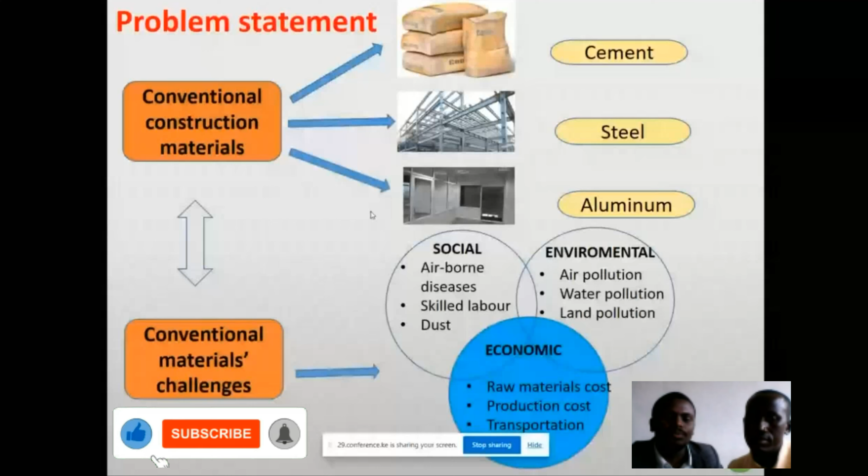To the problem statement: we are currently addressing a problem whereby we have been using conventional materials such as cement, steel, aluminium, whereby in the industries and manufacturing processing we are having challenges that are social, environmental, and economic. We are considering the economic aspect, which is the availability of material, production cost, transportation, and the cost of the raw materials.

Our main objective in this research is to investigate the suitability of lateritic material when it is blended with termite clay and varying proportions of cow dung. We have four specific objectives: one is to determine the physical properties of the material, compressive strength, water absorption for these CEB blocks, and finally determining the optimum mix ratio for these CEB blocks.

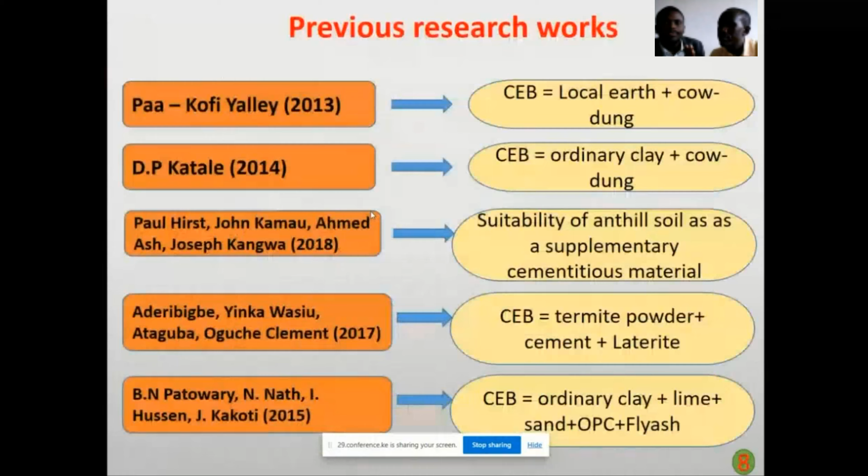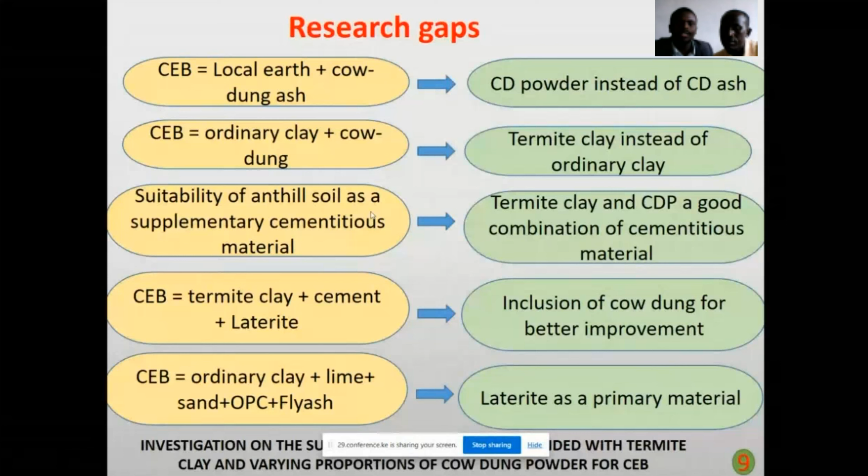In previous research, researchers have studied compressed earth blocks. But in this case, from what researchers have done, we consider doing it using cow dung powder instead of ash, termite clay instead of ordinary clay, termite clay as a cementitious material because of its properties, cow dung powder for better improvement, and lateritic gravel as the primary material for this research.

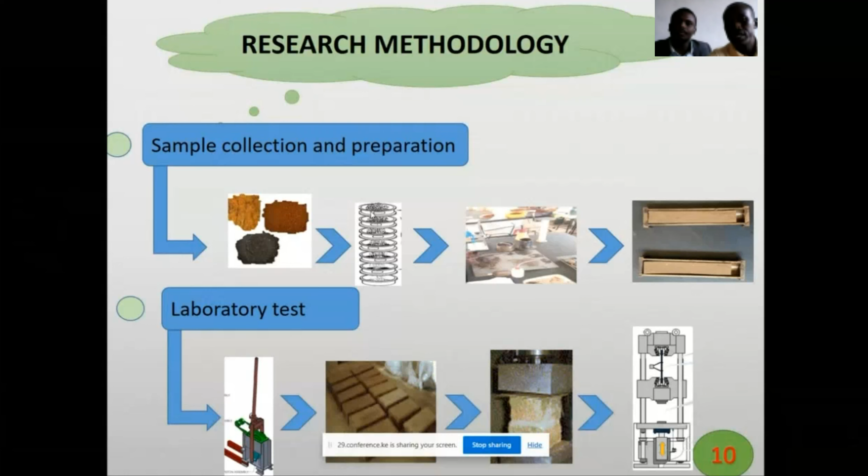On the research methodology, we are looking into sample collection and laboratory tests that we carried out in order to achieve all our objectives.

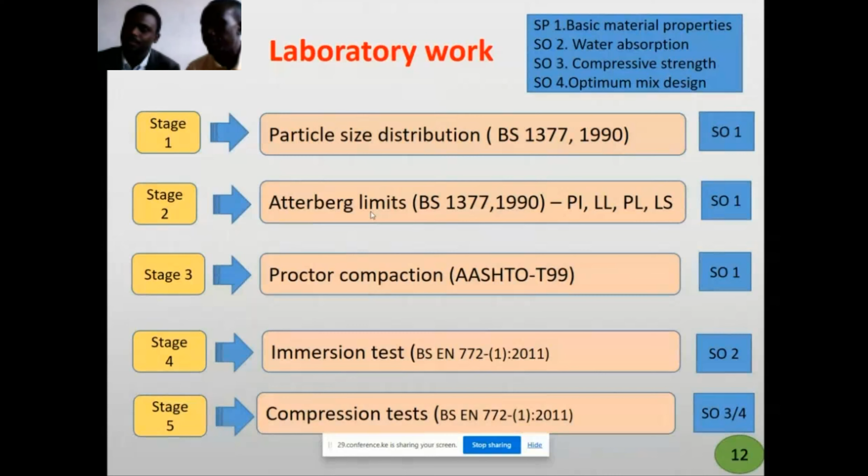In our laboratory work, we carried out several tests which include particle size distribution, Atterberg limits, Proctor compaction, immersion tests, and compression tests. All these tests enable us to achieve specific objectives 1, 2, 3, and 4, as indicated in the slide.

After the research and the tests, we made the observations of this project. For the particle size distribution, we found that the laterite was well graded, and the clay soil also had uniform and well graded particles.

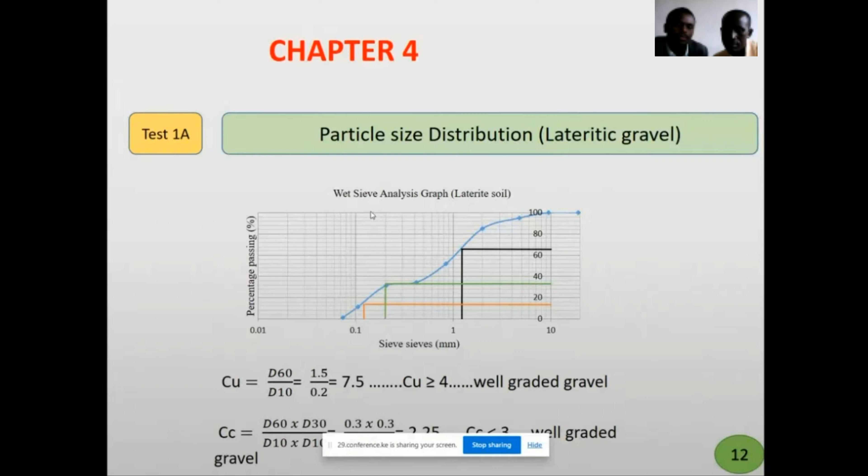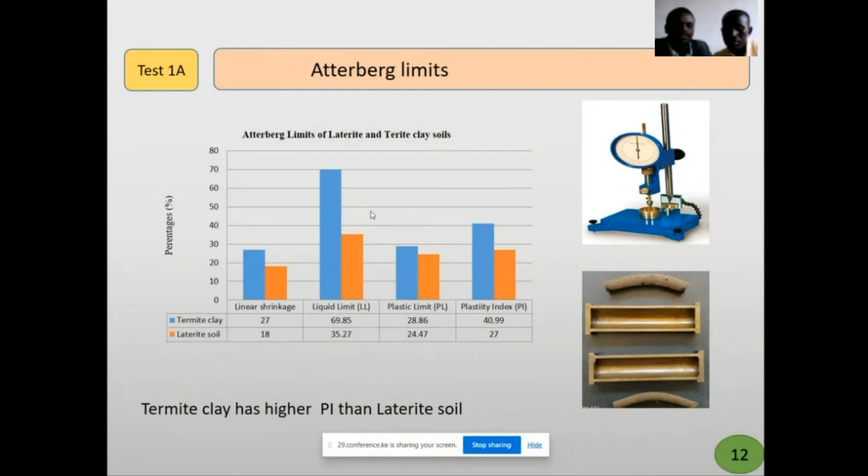When we come to the Atterberg limits, we compare the linear shrinkage, the liquid limit, plastic limit, and the plasticity index of our materials, whereby we find that termite clay generally has a higher plasticity index than the lateritic soils.

On the optimum moisture content, we find that termite clay has an optimum moisture content of 18.5% at 1510 kilograms per cubic meter, and the laterite soil has 12.5% at 1453 kilograms per cubic meter.

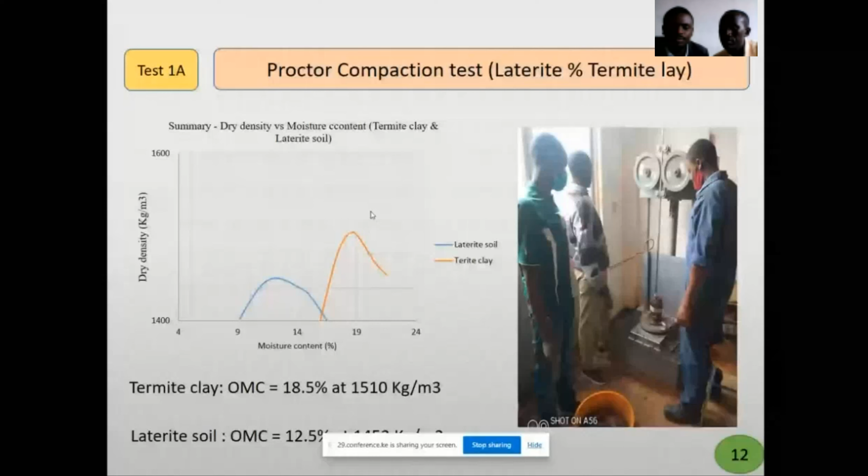On the compressive strength, generally we find that after the replacement of cow dung powder, 5% cow dung replacement in these CEB blocks gives the highest compressive strength, and we achieved 3.071 megapascals as the compressive strength.

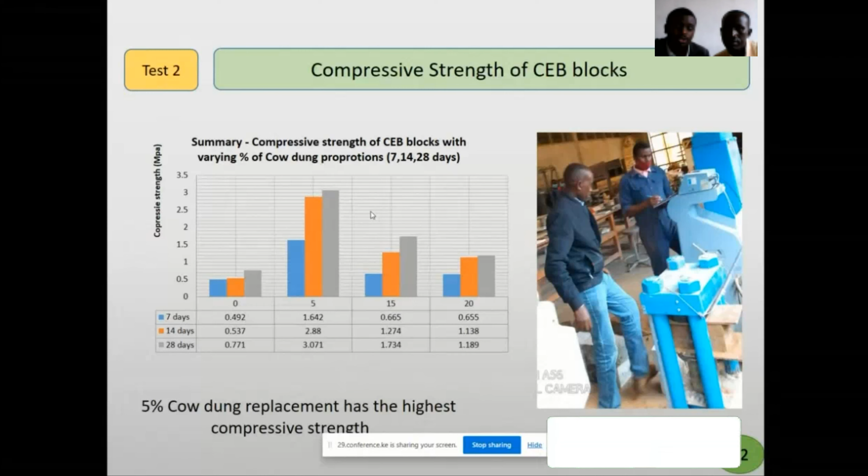From the research, we have an average of 2 to 3 megapascals compressive strength in these compressed earth blocks. So we can say that from this compressive strength, we've achieved a substantial compressive strength from the 5% replacement of cow dung powder.

In the water absorption test, we have cow dung replacement at 0, 5, 15, and 20 percent, and we see that an increment in the cow dung replacement results in an increase in water absorption rate.

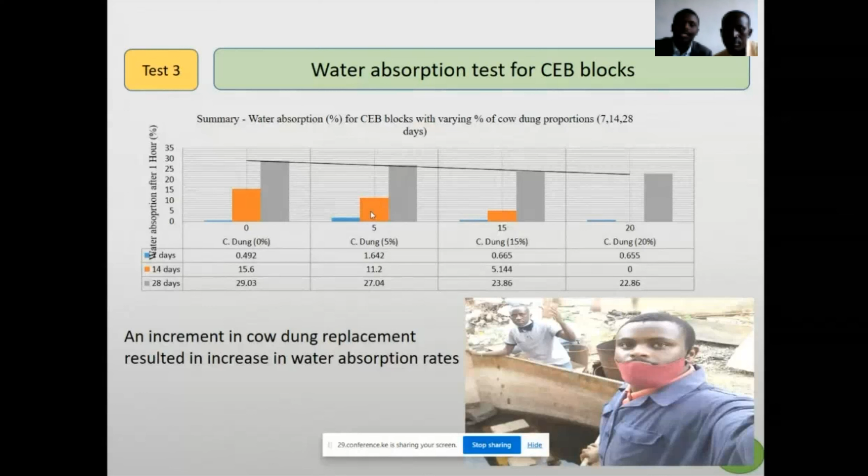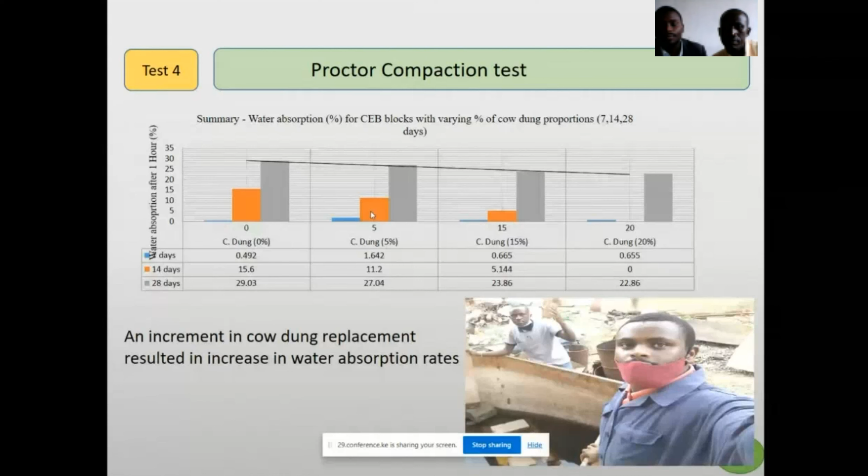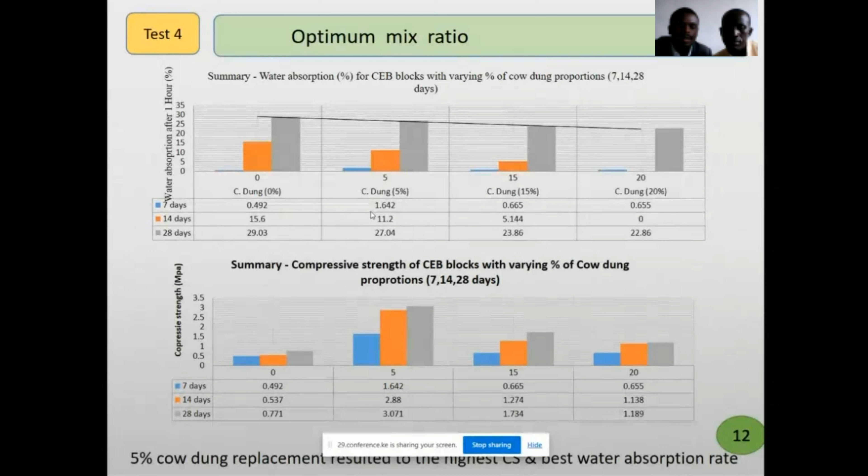We have Proctor compaction tests, which show that an increment in the cow dung replacement also results in an increase in the water absorption rates for the 7, 14, and 28 days of curing. We have the optimum mix ratios, which give comparisons of the different percentages, and we also have the compressive strength giving the different percentages and megapascals for the 7, 14, and 28 days of curing.

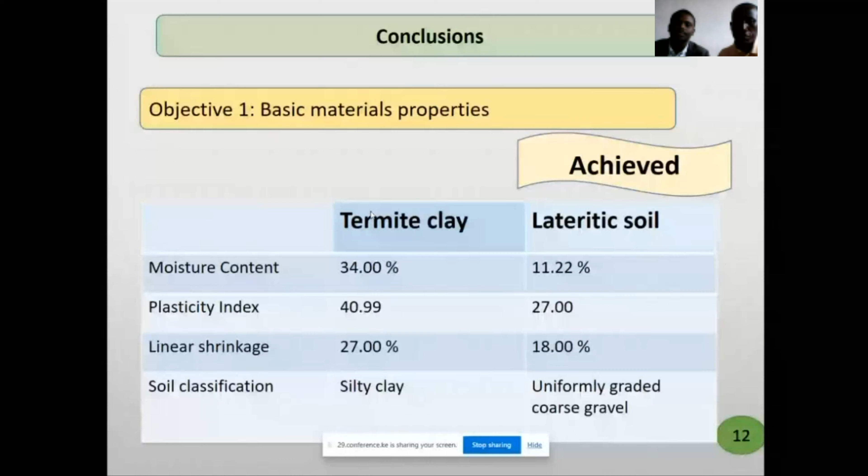On the conclusion, we looked at the basic material properties. We analyzed different properties for the termite clay soil and different properties for the lateritic soil, and we can see from the plasticity index the difference, the linear shrinkage, and the classification.

Now on the compressive strength, we also compared our 0% replacement, 5, 15, and 20%. As you can see from the screen, the 5% cow dung replacement shows a continuous increase from 1.6 to 2.8 to 3.0, from 7 to 14 to 28 days, as indicated in the slide.

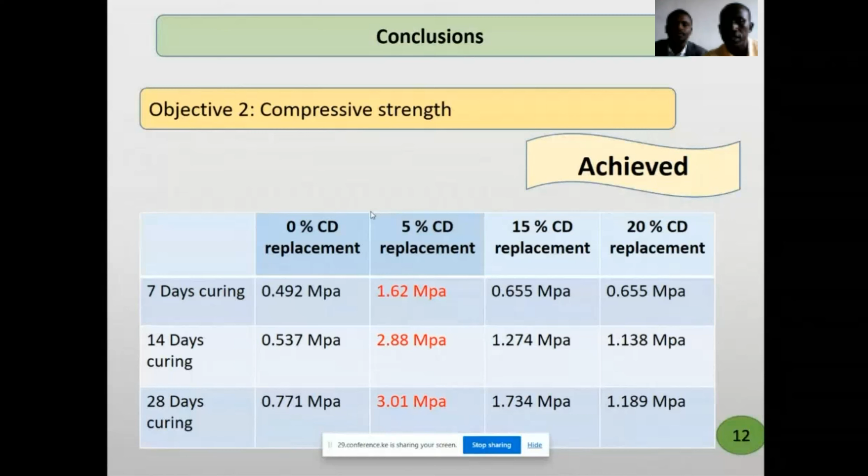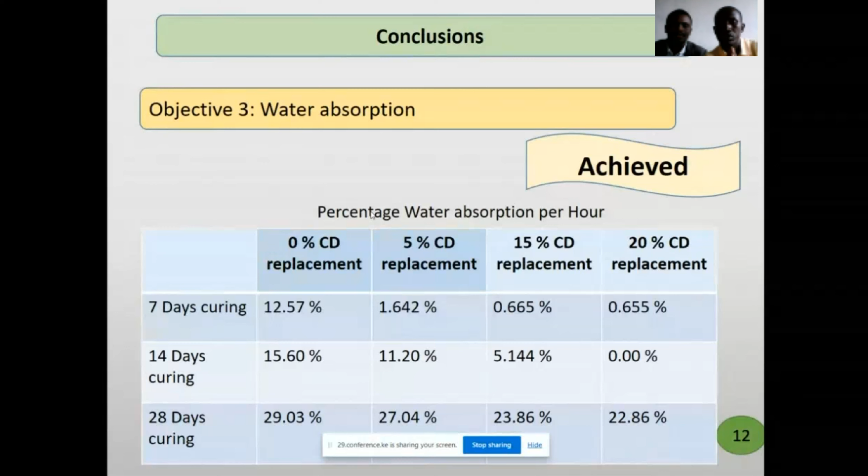Objective number 4 was also achieved because we determined the optimum mix ratio for our research work. We found out that the 5% cow dung replacement produced CEB with the highest compressive strength across all the days—7 days, 14 days, and 28 days. The values are given there, and this gave us the highest water absorption resilience, which is also indicated there. So our maximum, optimum ratio mix is 5%.

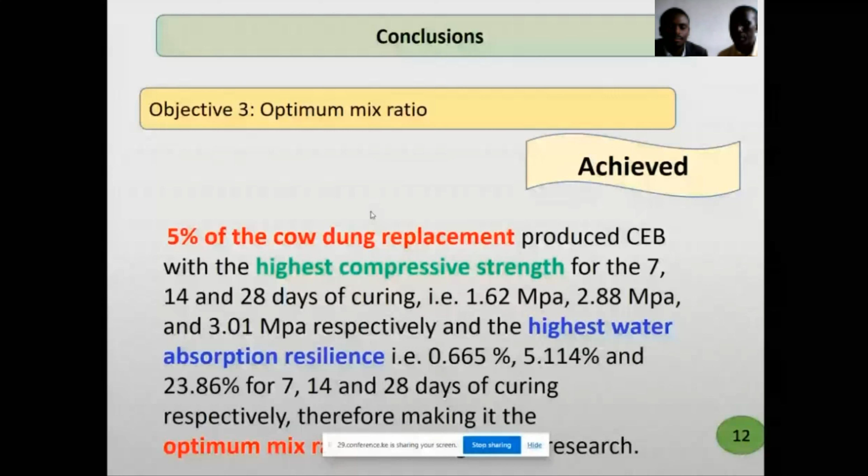In the recommendations, from this research we've gathered quite a number of recommendations. We've included 3 of them, which show that when we replace 5% cow dung in these compressed earth blocks, it improves the nature of strength and water absorption, and it can be used in areas and rural areas with minimal rainfall.

This is because in these areas, and from our research on water absorption, as you observe the shapes of the compressed earth blocks, based on recommendation number 3, their water absorption resilience is still not quite okay. If further research is done, we could look at how to improve the water absorption performance so that we can also use them in areas that experience high rainfall.

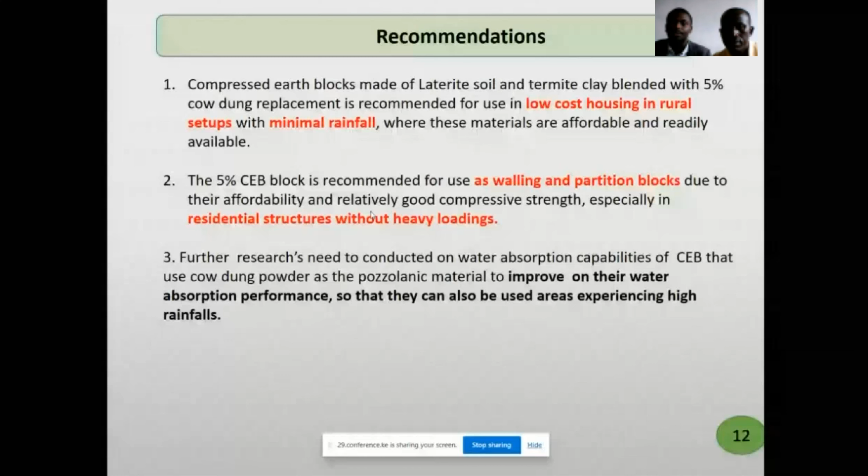They can also be used for walling and partitions, and in residential areas where we do not expect very heavy loadings. Thank you very much.

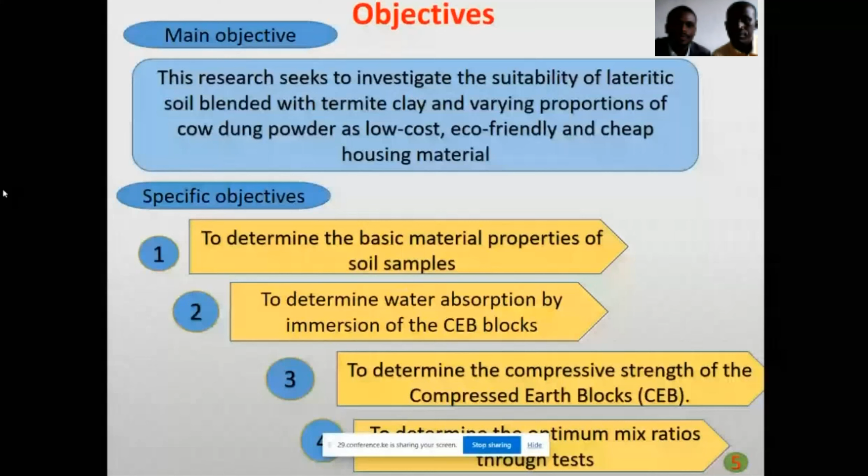Your title? Let me see your title. I think it's a bit lengthy, and I was wondering, do we really need this term 'varying proportion'? Investigation on the suitability of lateritic soil blended with termite clay and cow dung powder. Do we really need this term and 'varying proportions'? Because as you talk of the blend, it's not a complete replacement—you are adding in some proportion. Even the termite clay is some proportion, is it? Yes. You are adding termite clay proportion to the lateritic soil, to the laterite, is it? Yeah, so it means even that is in varying proportion. So I think you can shorten your title. Just talk with your supervisor and see whether these words 'varying proportion' are really necessary.

Okay. Thank you for your presentation. I like your confidence, by the way. Thank you so much. Thank you so much.